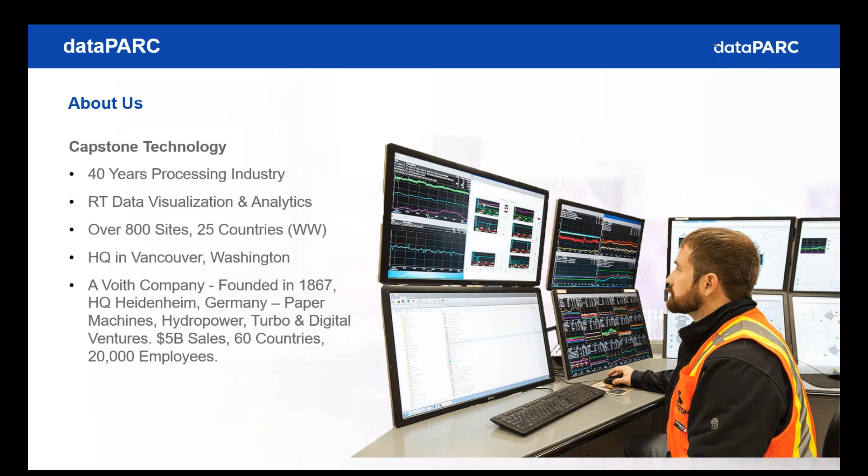So a little bit about dataPARC. It's a process monitoring tool. It has data integration to multiple data sources. We do real-time monitoring, graphics, dashboards, notifications — and those notifications come through email and text with links back to the system about what it's notifying you for, so you can quickly see and access what it's trying to tell you, what might have gone wrong, and get context for how to proceed to address the situation.

Calculations and analytics — calculations are client side, very quick. We also have server side as well. But analytics come with it too, so you can do some quick analysis right there in the real-time realm.

Event tracking with SPC, SQC, Pareto, control charts — those kinds of functions. We have a way to track quality, and actually a lot of customers use dataPARC PARCmde as their LIMS system. But we also point to LIMS systems as well if you already have one. So it allows you to bring process and quality data together on the same screen very quickly — very helpful.

In the modeling realm, we have the ability to generate PLS and PCA models. PLS has long been used for inferential property prediction in some other mechanisms, and PCA helps to model an exemplary operation you might have had in the past that you want to mimic going forward, and it helps you identify any offending variables out of your model set for the current operation.

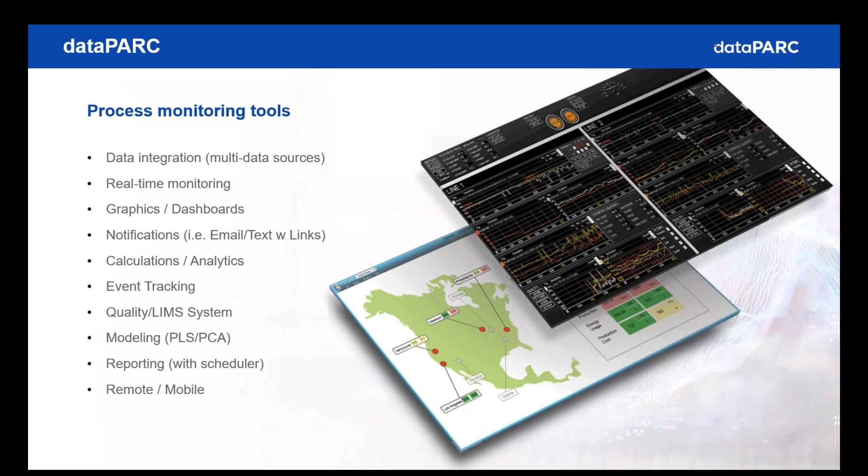We also have a reporting tool with a scheduler and remote and mobile capabilities. So what sets us apart?

Well, the system was first conceived and designed to connect to multiple data systems. So the process system, wherever your process data is and however many places it might be, we connect to that. We'll connect to the LIMS system if you have one, and to the ERP or SQLs. Some places connect to 40 different data systems—that was essentially unmanageable previously, but now is manageable by these connections. And then all that is behind the scenes, and the tool operates as a single tool, essentially seamless. Nobody really has to know where the data is actually coming from.

And then we have the #1 multi-trend as graded by our customers in the industry. That means you can put a matrix of trends up within just a couple of minutes—probably 100 to 120 tags if you wanted to, often 50 or 60 tags on one screen. It gives you that wide view of your process from end to end, helping you understand if an issue in one area is an effect of the issue or the root cause of it. So it allows you to quickly move to find where your issues might be.

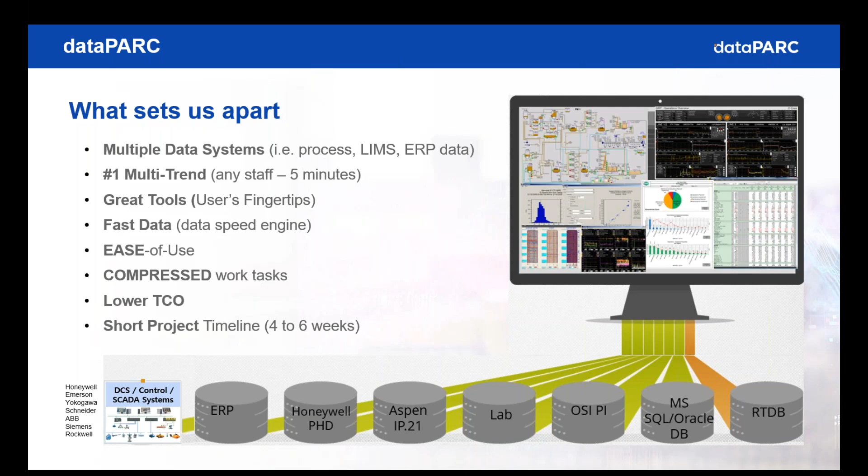So just a real quick look at some of our key customers. You'll see that we're across multiple industries. Pulp and paper has a big list of customers—that's where we got our start—but we have very key relationships and customers in chemicals, ethanol, mining and minerals, power, oil and gas, food and beverage, manufacturing, and other areas. I just wanted to point out a handful of customers here.

Of course, there's Drax Biomass—they're going to be presenting today. W.R. Grace Chemical is another key customer of ours, the Dow Chemical Company I'll point out, Saudi Aramco's S-Oil refinery in South Korea, and Energy Transfer.

And just a little bit about these: W.R. Grace has installed dataPARC at 6 of its facilities—4 here in the States, 1 in Canada, 1 in Germany, and 1 about to install it in Brazil.

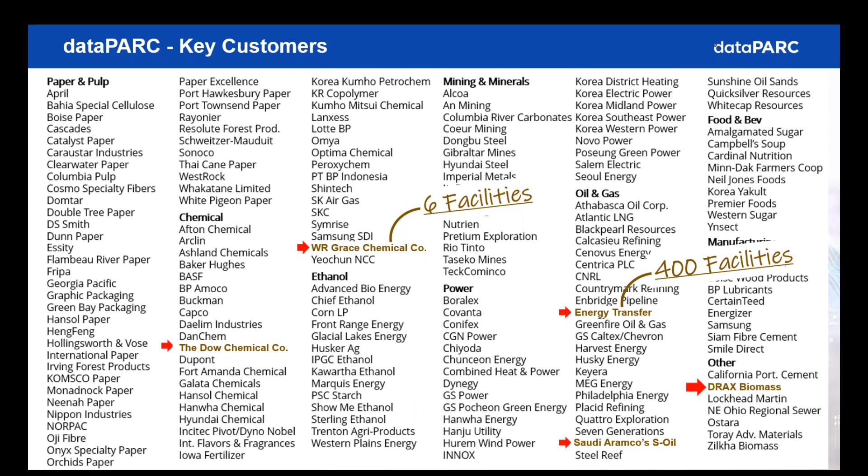400 facilities at Energy Transfer, and they're doing a massive amount of work. Over the last couple of years, they've done most of their installation across those sites, in 90,000 miles of pipeline as well.

In 2016, the 4th largest refinery in the world, the Saudi Aramco S-Oil refinery, completely switched out their 20-year system—one of the top systems in the world—to dataPARC because they needed performance, ease of use, and a good tool set by which a larger number of staff could adopt and use.

At Dow Chemical, we're doing work in some 25 facilities there, in Drax Biomass, multiple facilities. And just one last thing, Energy Transfer has done some presentations you can find on the web, but they're claiming $17 million a year in benefit from the installation of dataPARC and how they're using it there.

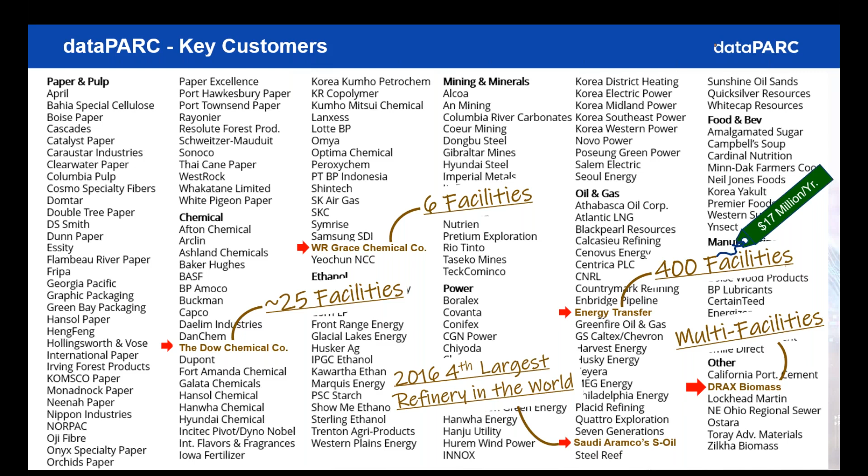I'm going to hand it over now to John, just to give you a reminder, and then Doug will step in and begin to talk about how Drax has applied dataPARC. By the way, at the end we will show a short 2-minute video that will give you a real look, not only at the tool, but how it might be used and how a person navigated through it to solve a problem. John?

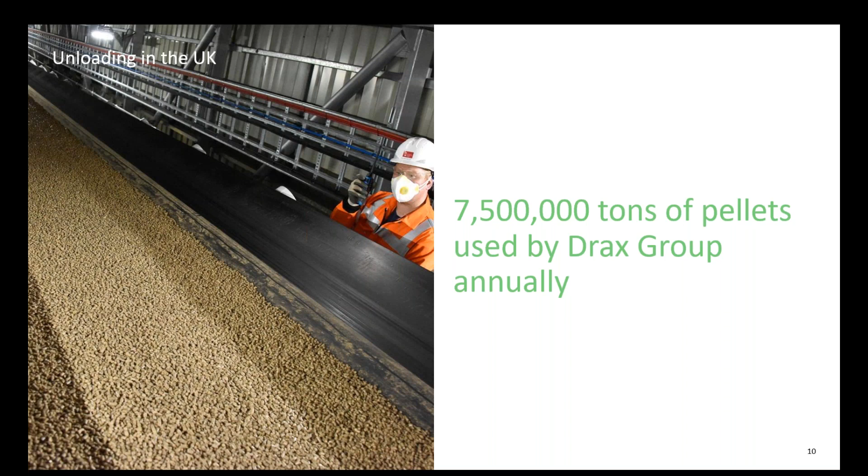So today we represent approximately 8 to 10% of the power consumed in the UK. We consume approximately 7.5 million tons of pellets each year to make that happen. Last year, the three plants I'm about to talk about with you were essentially 1.5 million tons of that.

And that really consists of this footprint. We're headquartered out of Monroe, Louisiana. We ship everything out of Baton Rouge, Louisiana, mainly through the main three plants in Bastrop, Louisiana—that's going to be the top of the map there—then Urania, Louisiana, and Gloster, Mississippi. If you don't know about Drax already, I won't fault you for not knowing where many of those are. If you look over to the far right, you'll see Aliceville, Alabama.

As part of the Pinnacle acquisition that we recently completed, we pulled that facility in. We've also pulled in some additional Canadian facilities as part of that, but just for the sake of today, I was going to focus on the Southeast U.S. operations.

We'll talk about it a little bit at the end, but we also have some satellite plant locations that we'll bring into the mix in the near future, and we'll also have a Demopolis plant coming on in the future as well. We'll be commissioning that here soon.

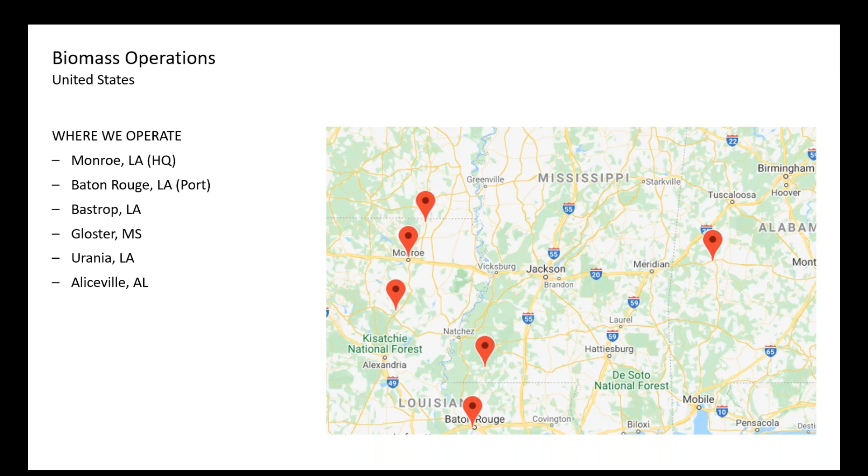So we'll talk about how we make pellets.

So we have three sources of feedstock. We have the hog fuel, which is our bark. We have residuals, which come from a mix of sawmills, which could be chips that come off their process.

It could be planer shaving, but it could also be round wood, what traditionally people think about whenever they're thinking about what comes into our sites.

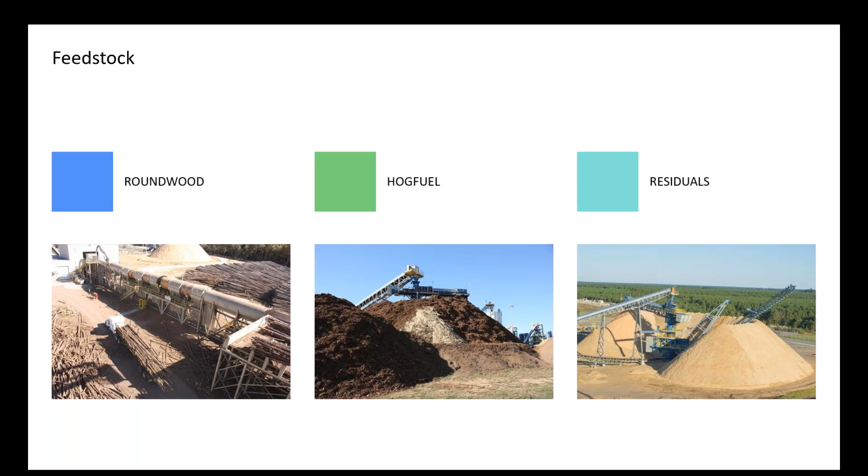Not a lot of additional processing variables matter at this point, other than making sure everything is running. And so at this point, we're really focused on our maintenance. This is not really the process we're monitoring from a process standpoint, but we'll get to that here in just a moment.

So not all of our mills have this first stage of sizing, but we do have wet hammer mills at a couple of our mills. So this is where we'll size just ahead of the dryer.

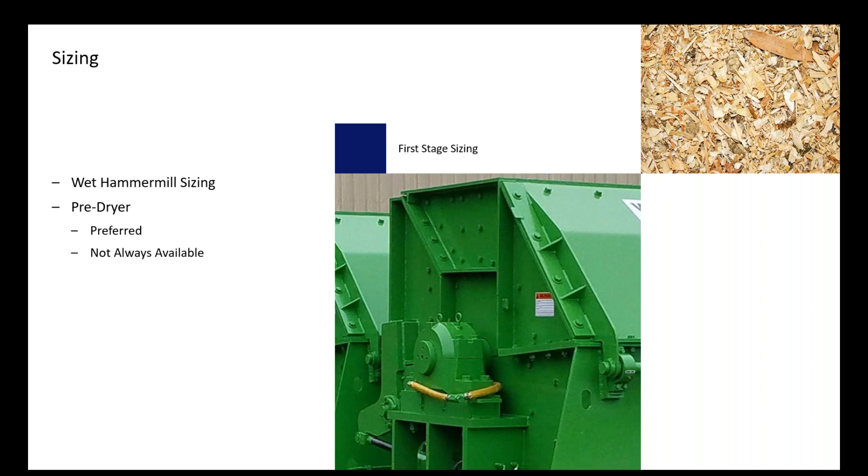This is what we'll call these large resizers. So chips are taken and broken down to a smaller size. We like consistency going through our dryer. Like I said, this is not always available.

So we send these chips to our dryer island. These are rotary tumble style dryers. That hog fuel I was describing in the previous process, that's where it's fueled from.

So we have induced draft dryers, large ID fans pull the air through the system. So we take these chips that start about 50% moisture, and by the time they exit the system, they're approximately 10 to 12% moisture.

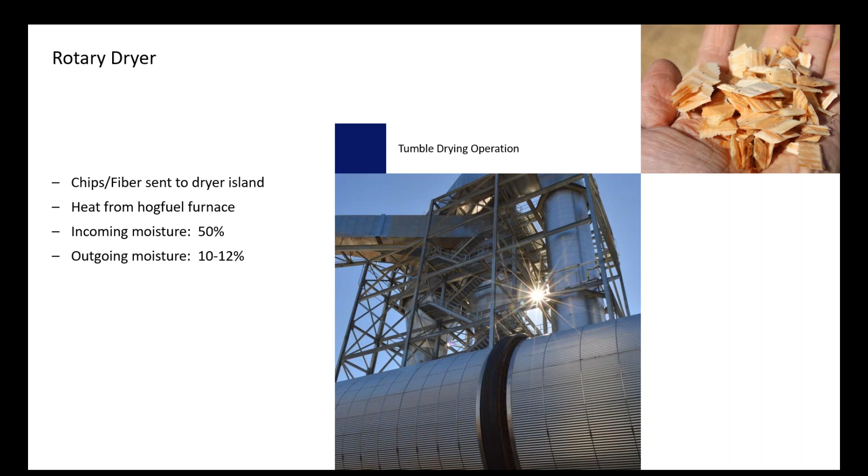So a huge evaporation mechanism here.

So then we have our secondary sizing, and it really is the final sizing. It's a hammer mill, just like the previous picture.

We'll go through and just go into the next stage, go to pelletizing. And really at that point, we just have rotating dies with stationary rollers, and it's really a compression. So people ask, hey, well, what are you doing there?

Some people add steam, some people add sometimes a dry additive, but you're having a lot of heat there. It's really a function of the natural lignin, which is an organic polymer present in the wood, and heat and pressure. So you're taking this wood fiber, pressing it through a hole.

If one of my people on Drax is listening, his favorite way to describe the process is you take wood, you chip it, you dry it, you beat it up, and you push it through a hole. And that's his version of describing the pelletizing process, which is not too far from a very accurate version of it.

So we take it, and we've taken this pellet all the way down to 6% moisture. So as we were talking about earlier, we're starting around 50%, and we've finished around 6%.

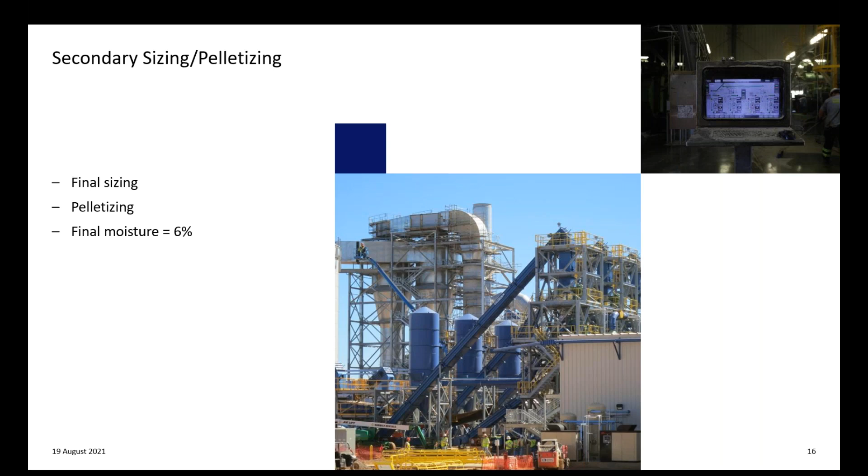So loading out and shipping it, depending on where the plant's located, we're doing a mix of rail and truck. And we're taking these to the Port of Baton Rouge, with the exception of Aliceville and eventually Demopolis, which are going through Mobile, Alabama.

And then we're going to the UK through where we have Liverpool, we have a Port Tyne. So when you look at what we're doing, so hey, why do we pelletize in the first place?

And ultimately, it's about shipping. This is about density, because we have a small biomass plant there that ultimately does the reverse process of what we're doing here.

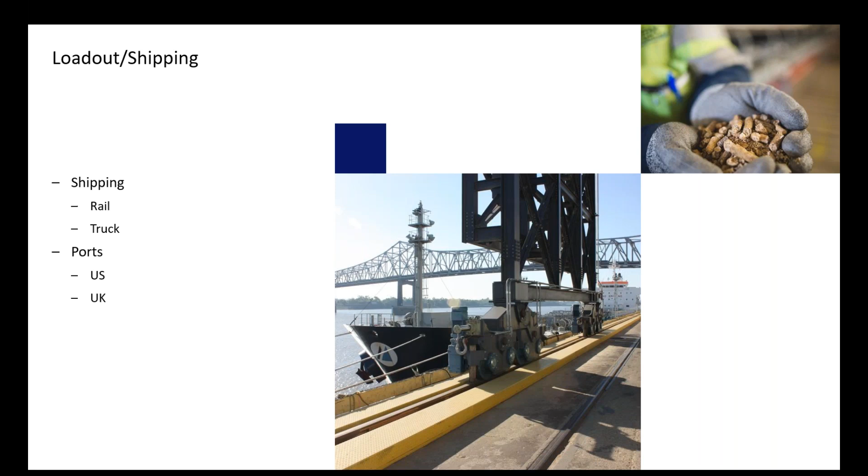And gets it back down to a dust form and puts it in the boiler in the UK. So let's just keep in mind that this is strictly for shipping.

We'd like to add that we do have the world's leading sustainability program, and we take a lot of pride in that. Our pellets provide a sustainable, low-carbon fuel source that can be safely and efficiently delivered through our global supply chain, and we use these pellets to make flexible and renewable electricity for the UK.

So now we talk about our process and how we make decisions, and it's important to also talk about where we started. So we talk about our data management. Data was entered into manual checklists that we then stored into a collection of file folders in various locations. We had multiple spreadsheets that were also maintained in multiple locations.

And we kind of moved into the technology piece. We had a historian that was painfully slow, and for each plant location, it was accessible at only one station in the plant for 2 of the sites. We did have a little bit better version at one of the other sites, but it still had its kinks as well, and poor detail for the data that was accessible.

We had no regular exports or data syncing, and the visibility of the process from the outside was remote access to live screens. And when I say that, I'm talking about access at the HMIs, where somebody can go in and literally press a button that the control operator, room operator is looking at. People with nefarious intentions can do terrible things in those scenarios.

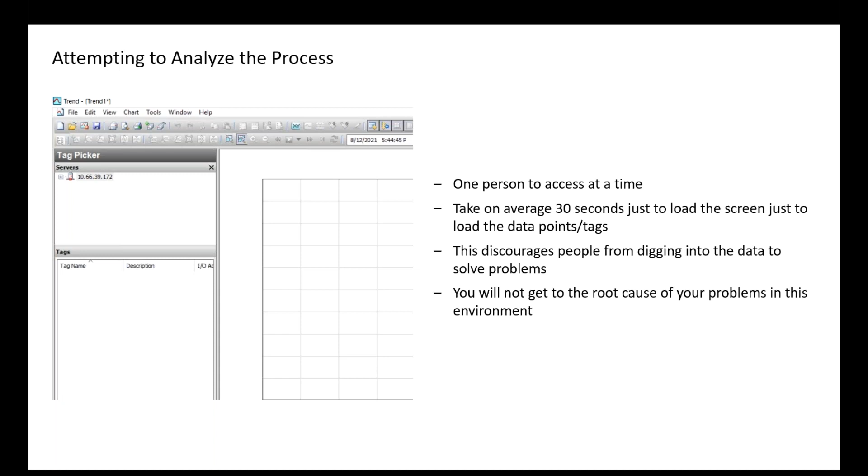And this discourages people from digging into the data to solve the problems, and you will not get to the root cause of your problems in this environment. I firmly believe that and witness that in action. Root cause analysis without data will only leave you with testimony.

And our availability was low in those days. We were definitely low in the maturity point as far as our journey. And when you don't have good data relative to where your downtime is, where do you focus your efforts? You tend to focus on your big rocks, but you don't focus on the death of a thousand cuts in those situations.

For example, our quality data was tracked and accessible over the radio or via paper copy. So it wasn't being used consistently to make decisions throughout the shift, or it wasn't even being pushed to a centralized source to share with other plants. And for me, slow data is equal to no data, because in that situation, it will not be used.

Then you have the thick clients that we pull for site access, corporate access. So we have process and quality data at various frequencies, historized over multiple years, and we have it for machine part tracking. We calculate tooling usage, we have MDE reports, and I'm going to walk you through a couple of the different functions that we have for these.

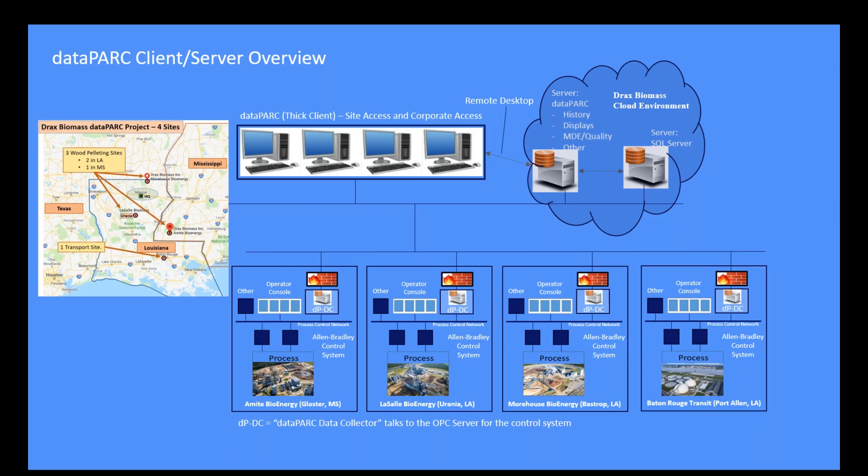So downtime is now logged for each piece of equipment. We mainly focus on our pellet mills as our main piece of output for each facility. We judge how much tonnage we make for pellets. So it's definitely how we judge this facility, and this is valuable, and it's something we're putting a lot of effort and focus on.

Our frontline staff are able to enter causes that our reliability engineers are focusing on, and ultimately this is where we're going to focus our efforts.

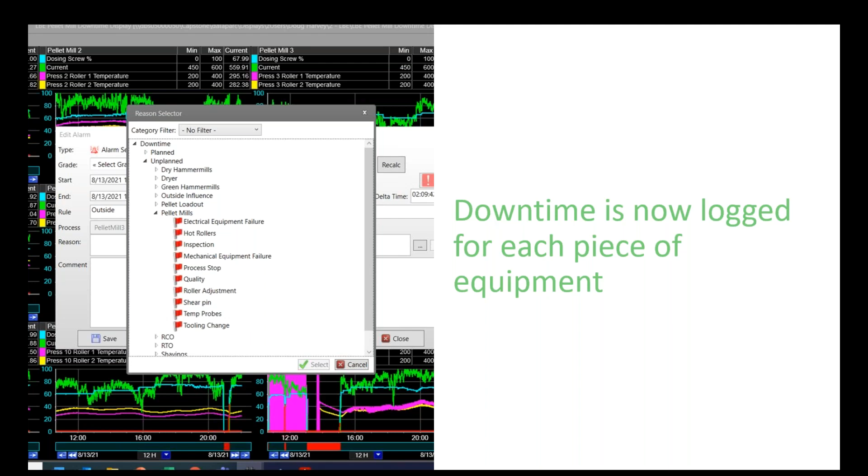So if a shear pin, for example, is a 15-minute event, if you only look at it on a shift log, 15 minutes doesn't feel like a big deal. But if I look at it over a longer period of time, over 6 months for example, and I'm starting to see shear pin events, and I measure it against all of that, all of a sudden—like I said, originally I was looking at big rocks, maybe this 400-ton miss—but now if I look at it over a longer period of time, I'm looking at the complete picture.

So frontline and managers alike are engaged in its use every day, and to me, this is the biggest win for Drax with regards to dataPARC implementation.

So I'd say that everybody from our CEO down to the operators uses this system. My finance and HR people probably aren't using it, but everybody else probably has some version of a dashboard or a graph that they're looking at in some capacity.

I generally judge by how many folders and who has a user's folder. So I'll look in and see, hey, my pellet mill operator has a folder and he has his trends in it, and my control room operator, she has her own trends in it. Everybody's looking at their thing, and they may have a chart that says, hey, dryer troubleshooting, July 9th, and you can see what they were looking at that day.

And that tells me what kind of problems people were trying to solve, what they were looking at. It's also an opportunity to say, hey, this is what they were seeing—like, I was having this kind of problem, I can go back to that day and see what kind of things we were looking at.

But it also shows that people are embracing data, because you have regional corporate support like myself, you have the plant managers, process engineers. Everybody's embracing it, and everybody's learning from each other. It's kind of one of those things where you don't have to reinvent the wheel.

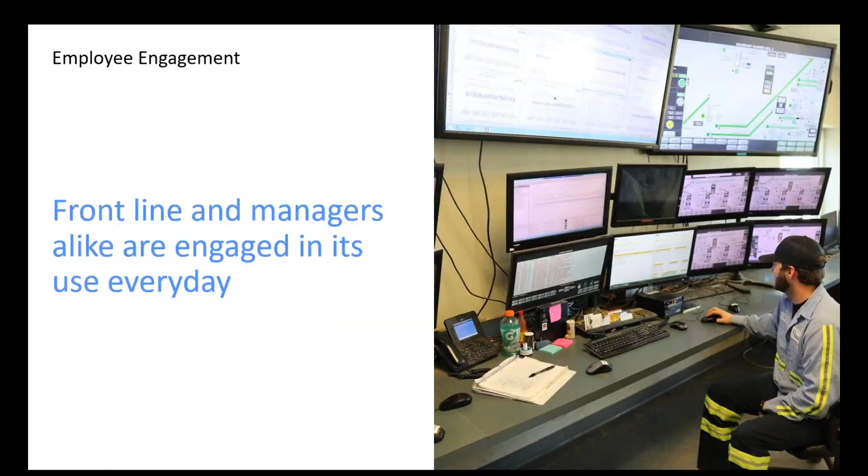So quality data is entered constantly, and production personnel now expect and request the data. Not only do we build something like this MDE right here, a manual data entry form, you'll see where a lab technician may request, hey, I want to see this constant data on the top, for example.

Not only do our technicians and frontline personnel enter the data that we request, they may also request a change—and I put this one here on purpose, this is where we add a tweak. So, hey, we decided to stop taking this one particular sample and take another sample instead. This is when we change the form. We took feedback from the operators, and we're going to do something different, so that's why there are blanks on this form, for example. But it used to be in Excel, and we couldn't track and see the trends.

When quality went off and something was going on, we didn't see it, or if you tried to go back with an issue. For example, when we load a train, we ship one out about every 5 days, and if we had some bad samples at the port, you're trying to figure out what happened. You spent 5 days loading it, then you're trying to go back in time, and you didn't have that data. You had to go backwards and look through those sheets in a file. This way you can go backwards.

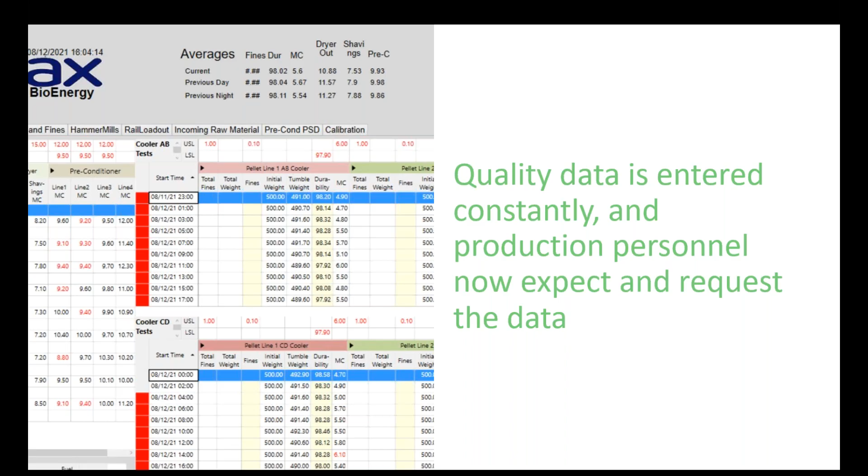Our morning meetings are run from displays built from ParcDesigner. If you look over here, we have availability numbers on day shift for LaSalle. There's a display in the middle of the plant that shows how much material we have on our chip pile and our fuel pile, and this is what we run our meetings from. We talk about availability misses, tonnage misses, and that's what the team runs from. It's dynamic data, and if you want to drill into it, you have the ability to do that.

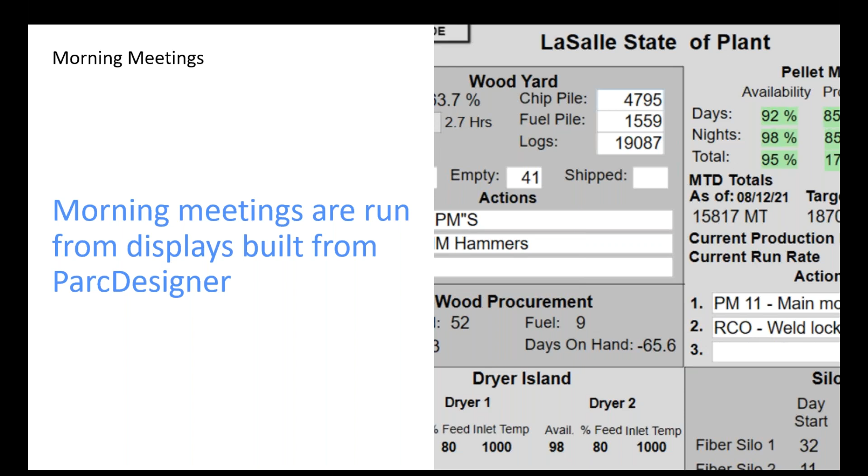Go back in time a little bit—I was plant manager when we started doing this, and this was one of my big asks: that we run our meetings from displays like this.

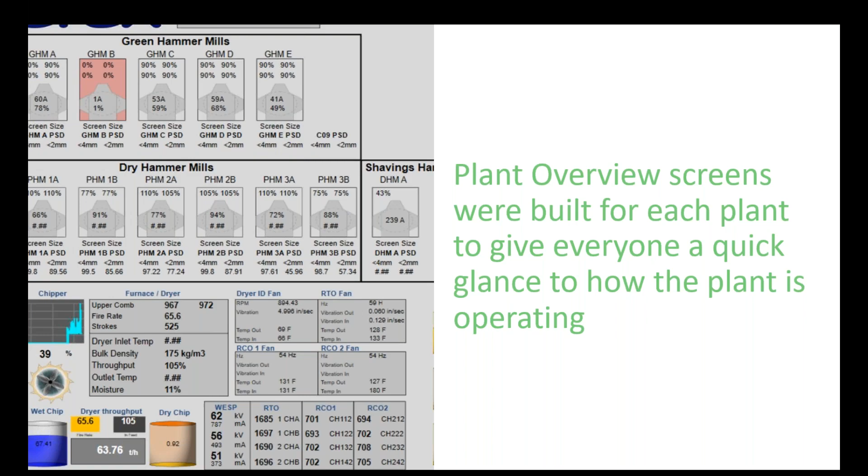So if I said, hey, we have a quality issue, or we've got something going on with our hammer mills, we can drill down into this page and go into exactly what's going on with the hammer mill. Okay, I don't have my hammer mill throughput—there's 3 hammer mills down. If I have 3 hammer mills down, then I'm hoping my maintenance manager is going to tell me what we're doing about that today. So you get to keep drilling down, and it's laid bare—you get to talk about exactly what's causing your problems, and you can keep drilling down.

I also talked about forms that went away into file folders each day. Now we have daily checklists that are part of the dataPARC system, and they can send out emails if not completed by a certain time of day. I don't want to find out after the fact that I missed something. We have daily visible emissions checks as part of our environmental compliance, and it has to be done in daylight hours, so we've committed to doing these by lunch each day.

This is a Method 9 type inspection, and if it isn't done by 2 o'clock each day, it sends an email to the plant manager and the environmental manager saying we have not done our visible emissions check. So by 2 o'clock, I still have time to do something about it.

This is also one we're really excited about—we have the opportunity to do some additional modeling. We're currently doing a proof of concept using PARCmodel PLS for predicting key process variables. One variable being modeled is our dryer outfeed screw rate. We're seeking to understand how to remove barriers and increase production, identifying which process values are slowing down the entire process. Right now we're focusing on one dryer, trying to figure out what correlates and what we can do, then essentially build a model around that, which ultimately is what our operator would focus on.

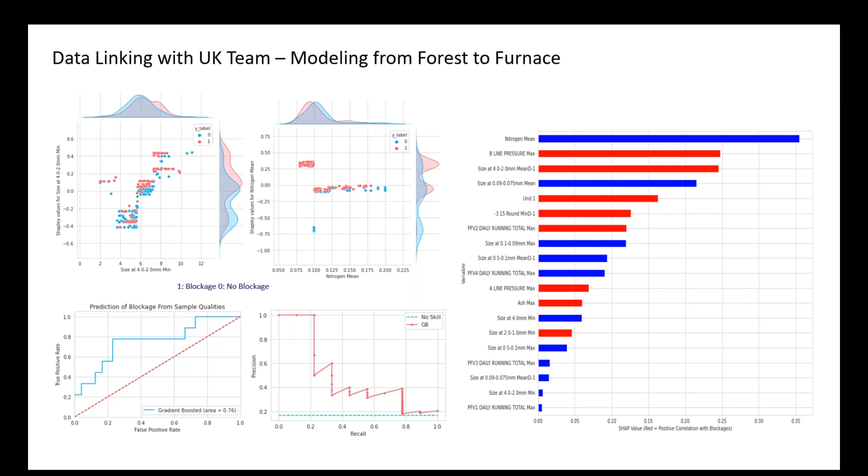So our benefits case, and I'm sure I'll miss some here. Root cause analysis is probably one of the largest benefits. When you don't have a clear look at historical data, and all you have is people's testimony and what they thought they saw, you're at a disadvantage. Access to the data with good tools lends itself to finding the true cause. dataPARC allows us to know the real problem when it happened, instead of having to listen to somebody's word. Tools greatly compress the amount of time to identify and fix a problem.

So when I go in and dig and show it and reveal it to everyone, we all align around it, and it makes us look and dig deeper and ask questions, and it reveals itself. Because at the end of the day, recollection is faulty, and it's not negligence or ill intent, it's just faulty. This is a great tool for all of us, myself included. We all have that mistake where we think we remember something, and then we look a little deeper and it's just not the case. This is a tool that we owe the people on the front line.

So for cost benefits, one example is that we're a company that has used additives. So when we add a new additive, we can quickly determine its effect. We can look at when we change dosage, track the time when we do it, and track the process as we add it. It gives us a better sense of when we push that additive, when it's doing its job, and whether the effect is linear. So we can see when we made the change and what was the effect on the concentration.

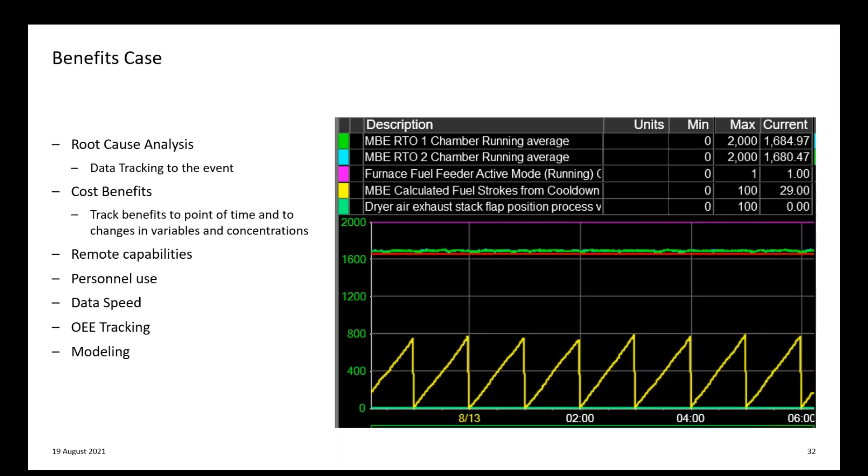So modeling as well, we hit on that a little bit earlier, but like I said, we're really excited about what that could be for us.

So looking forward, we talked about technology around the Forest to Furnace initiative, the PARC model, and our embrace of data science. We have a large team around that on the UK side, really looking at the different things we can tweak, and also what correlates - what can I change or invest in on this side of the pond. So we call it focusing on something on the US side that hopefully translates into results on the UK side, and what that can mean for us as the whole Drax group.

And then for investment, we have our satellite plants in Arkansas that will start to come online relatively soon, the commissioning of our Demopolis, Alabama plant, integration of Pinnacle. It's been really exciting - we were a 300-ish person company back at the first of the year, and then with the announcement of Pinnacle, we literally a little more than doubled the company, and pretty much doubled the capacity of pellets.

And then we've had several expansions of our existing facilities over the last couple of years, which has been really exciting. And then innovation - we have a viable fuels group that's looking at all kinds of things that you can burn, as well as woody biomass, BECCS, which is one of our versions of carbon capture, as well as just other forms of growth. So it's exciting to be a part of Drax at this point in time.

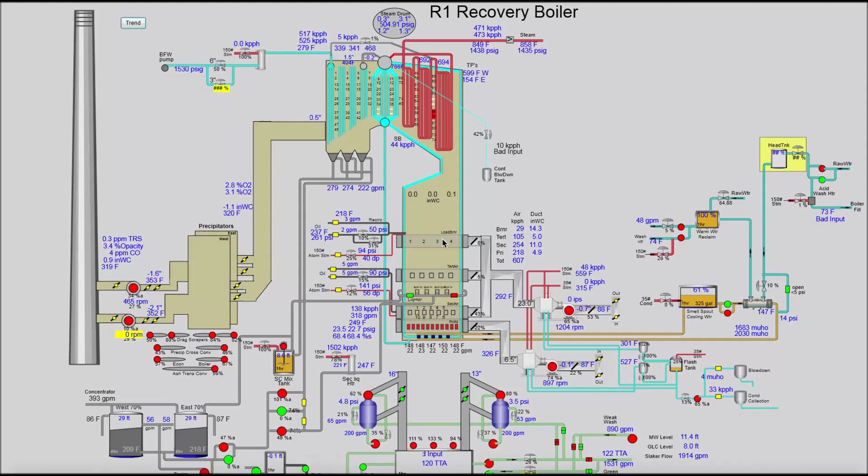I guess I wasn't talking there for a second, but he's looking at the steam flow there. There's the erroneous signal on the multi-trend. He's going to go back and forth and take a quick look. He's going to take a look at a 7-day trend on that guy. He's already synced up the rest of the trends to find out that there's nothing else that indicates it's the equipment.

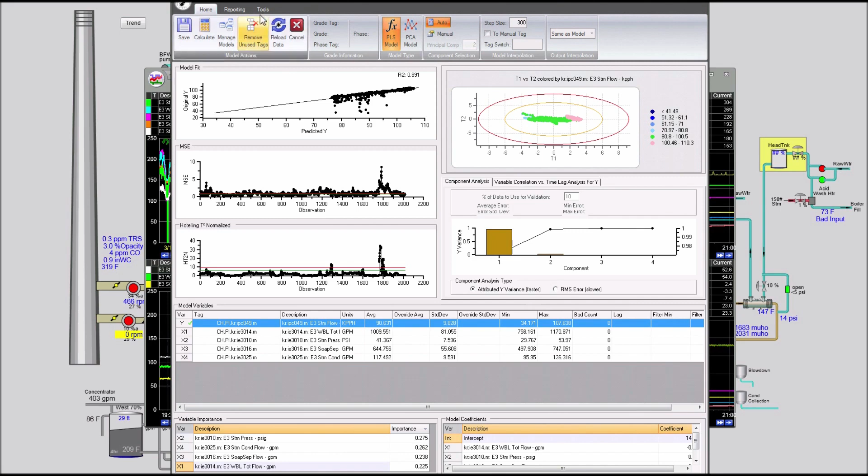So right now he's pulling on correlative variables. He's going to generate a PLS, see if he can generate a PLS model of that steam using surrounding variables like condensate, et cetera. So he's pulling up the modeling tool now, doing the PLS session, and has generated a model - 0.89 on the model is very good. He's looking at the 4 inputs to that model. They all look like equal contributions, so he's not going to remove any of those. Going to take a quick trend pop-up on that guy, and it's that 6th trend down there, that odd color looking one.

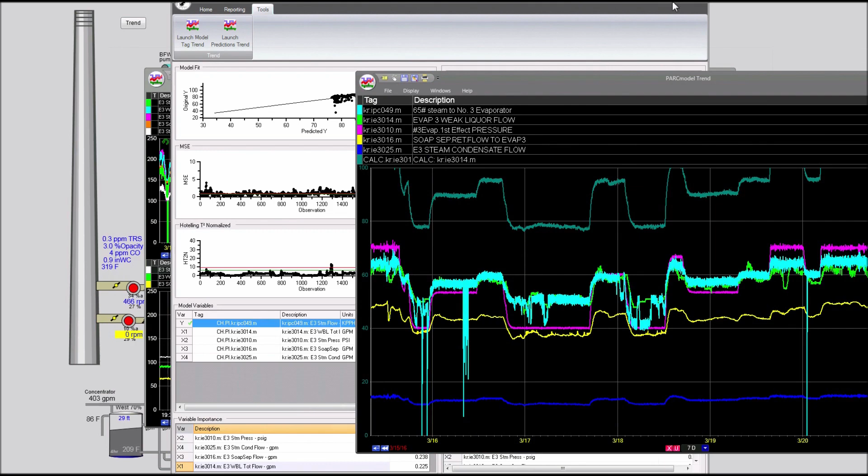So he's going to get rid of the modeling tool now. He's going to take that PLS model and drag it on over to the original trend and get rid of the pop-up.

Now he's got that odd color model calculation on there. He's going to change that to make it more clear, change it to red, and then change the range. And then it drops it right down on the green steam flow line. He's going to get rid of the two variables that he added so it goes back to as much normal as what the operator would normally look at. He can zoom in, zoom out, take a look at it.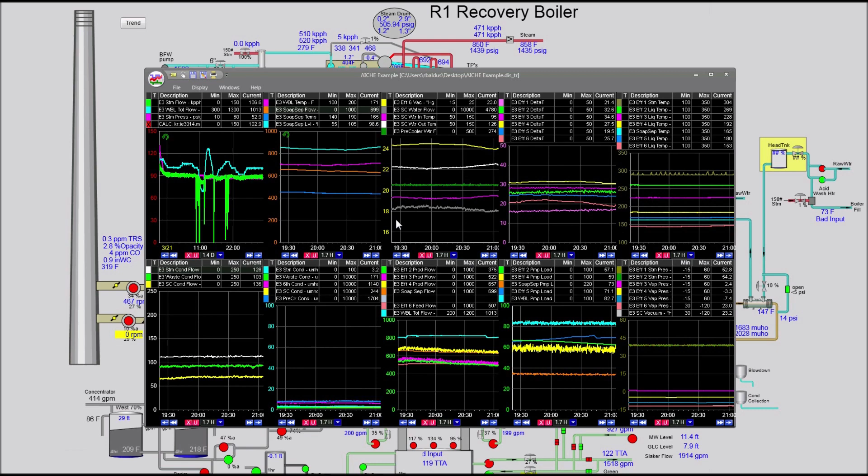And he sees that this is really where the variable should be, and he can turn the model variable off if he so chose. So in that period of time, he pulled up the trend, zoomed in on a certain area, and synchronized the rest of the trends so they could see if there's anything else going on that would indicate it's equipment. He understood that it was the signal, and we give the opportunity to generate a signal, a model that could indicate what that flow is and have the operator use it.

So just wanted to show you how you can navigate through a small part of what dataPARC is. That's just a small part. We didn't talk about notifications and reports and those kinds of things, but hopefully that gives you a good flavor for what the tool can do.